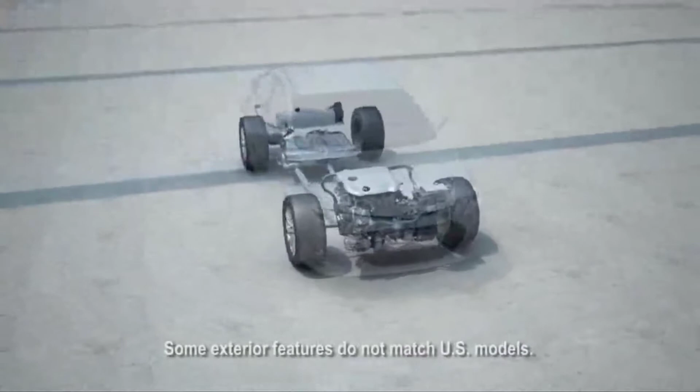The Sonata's hybrid blue drive is a quantum leap in engineering and fuel efficiency. So check this out. A quantum leap in engineering and fuel efficiency.

Why is this guy so massive? Because life.

Whoa, this is technically considered a hybrid starter generator, but look at it. Why is it so huge? What is it trying to do? What does it do? What's its purpose? Nobody? Hello? No?

So the engine, what's up? To start the engine, yes it does start the engine. What else does an alternator do? Well, it charges the battery. So this one is a hybrid. It does two things: it starts the engine when it comes to a stop, as well as charges the battery when it needs to be charged, depending on the amount of amperage input and output needed to support all of the electrical accessories in your vehicle. So since this is considered a hybrid system, it has a more robust hybrid starter generator.

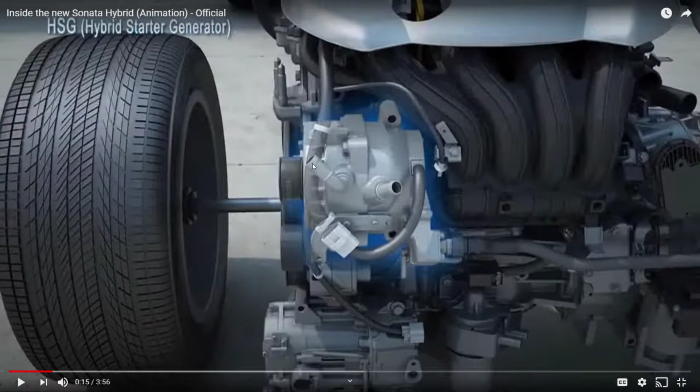Now, do you see these pipes right here? What do you think these pipes are for? This one and that one.

I love how I've been trying to talk this entire time and my mic's been muted. Oh no.

Cooling, yeah. So on this one, this is a rare case, but a lot of these heavy duty applications, you're gonna have an alternator that has a cooling passage with coolant in there. It's controlled by your engine temperature, coolant temperature, and thermostat. So it uses a water cooled system to keep your internal components cool. About 99% of alternators either have an external fan or an internal fan to cool it. In this case, this one actually has a coolant passageway that goes through the alternator to keep it cool. So it's pretty interesting.

The only thing, what do you think is the one downside about this system? About this one component right here? What do you think is the one downside?

It'll probably be pretty expensive to replace. Yes, it is very, very expensive. We had a 2013, 2014 Malibu that I was working on at one point at the dealer, and it had something very similar to this. It didn't have a coolant passage alternator, but it did have an alternator that was doing the ISG, integrated starter generator, purpose. The customer came in already out of warranty, and of course we did the diagnostic test, electrical circuits, checking the voltage, checking the parameters. The computer was commanding it correctly, but the actual ISG was not functioning properly. This component for the Chevy Malibu at that time was $1,200, not including labor for diagnostics or installing. So $1,200 to replace an ISG starter generator system.

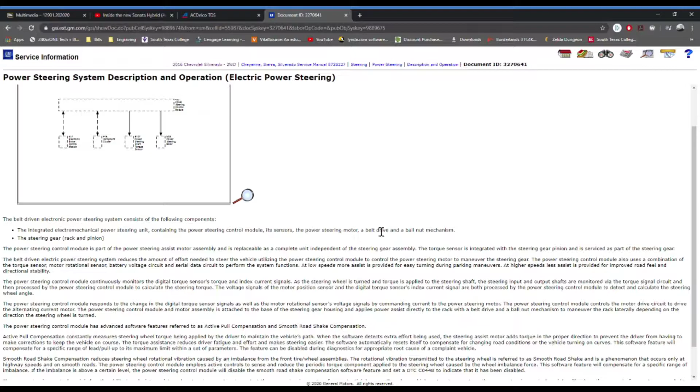So check this out. On this power steering system, the belt-driven electronic power steering system consists of the following components: an integrated electromechanical power steering unit containing the power steering control module, its sensors, the power steering motor, a belt drive, a ball nut mechanism, and the steering gear rack. So the whole thing would have to be replaced, and that's why it's extremely expensive.

Now, how do you increase the amount of effort in an electrical motor? What do you have to increase? It's electric, so how do you have to increase it? You have to increase the amount of amperage.

Exactly. So when you start adding a lift kit, big tires - 35 inch, 36 inch tires - something that's not supposed to be on there, what is happening to your motor now? It doesn't have enough power to actually turn the wheel. So what happens is you're stressing out this small electric motor that is not designed for this, and it overheats.

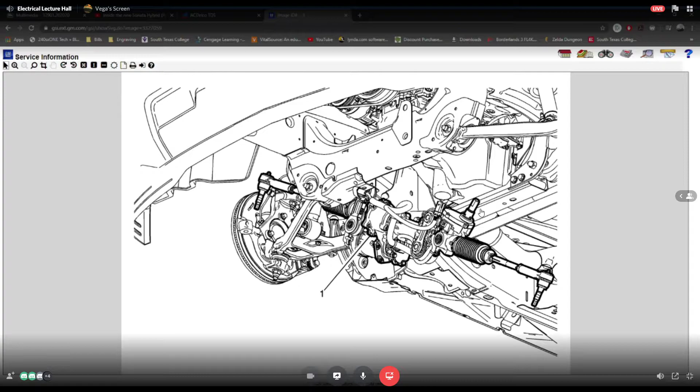Once it overheats, that's it - you cannot fix this unit. This unit is this whole assembly right here. Number one, this is your electric motor. This is your whole rack with your inner and outer tie rods, as well as your steering linkage that goes right there. This complete unit would have to be replaced in this instance because everything's built in - the motor, the module, the sensors, everything is inside this one module.

It's insane. Usually on a hydraulic unit, you have a power steering pump, some lines, and the rack - that's about it. You can replace things separately. On this one, it's not the case - it is a module slash power steering rack slash motor slash sensors, all combined in one unit.

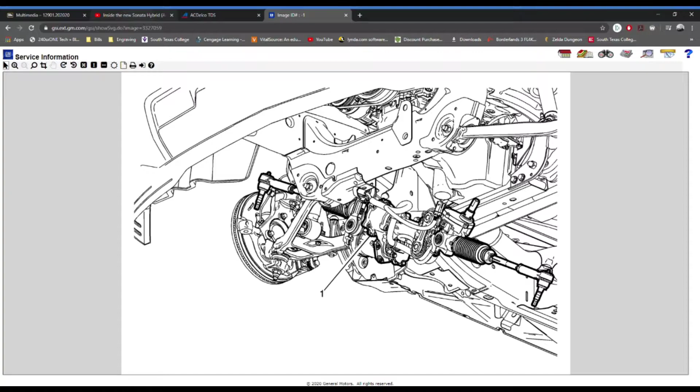It works good, but once it's being used for stuff it's not designed for, that's when things start to fail - and that's with any manufacturer. It's not designed for aftermarket things like that. It's pretty interesting, I've run across that several times at the dealer, and it was an expensive repair - you have to replace the whole damn unit. Customers didn't like that.

So going back to the HSG, this is Sonata's design for their hybrid starter generator. It is a massive looking thing. It is water cooled, and it does several things to actually charge the vehicle as well as start the vehicle when it is in a stop motion.

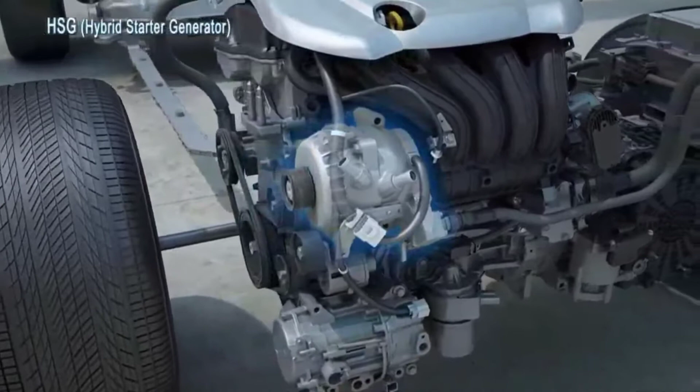Its unique system uses a hybrid starter generator to start the gasoline engine. Now if you look at this, it has a giant belt. It kind of reminds me of a supercharger belt, and it actually has several pulleys to apply a lot of tension to this actual hybrid starter generator.

The reason being is this guy has to rotate the crankshaft. The crankshaft is connected to your pistons. It is able to rotate the pistons and apply fuel and ignition to get it going instantly. So it's a very smooth transition.

Be sure whenever you work on anything new that you don't know - I've told you before - always look at the description and operation before handling any type of work like this. So be careful.

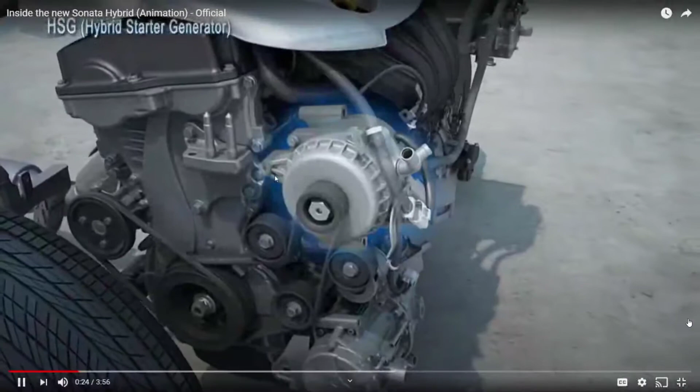The hybrid blue drive system. Hold on, what do you think? What do you think these two are?

Probably one's the water pump. Yeah, more than likely this is the water pump. What do you think this is? Power steering pump, most likely. What about the AC? Yeah, probably, could be the AC. I don't see AC lines going in though. Could be the power... actually, I think these are the AC lines right there, they're just not showing it. We'll see, maybe we'll see it later on.

But if you look at the front of the engine, there's not a lot of stuff going on. A lot of your vehicles nowadays have a giant belt going through your alternator, your pulley, smog pump. There's a lot of different things on there, AC compressor, idler pulley. They're actually bringing it down a lot.

If you look at this, more than likely this will be a water pump, which is physically driven by the harmonic balancer. This is your alternator, and I think this is your compressor, but we'll find out when we go through the video. They're actually releasing a lot of load by removing things that are being driven - AC compressor, smog pumps, alternator, power steering pumps - things that aren't really needed are being removed, which increases your amount of power from your engine as well as the fuel economy your engine can output.

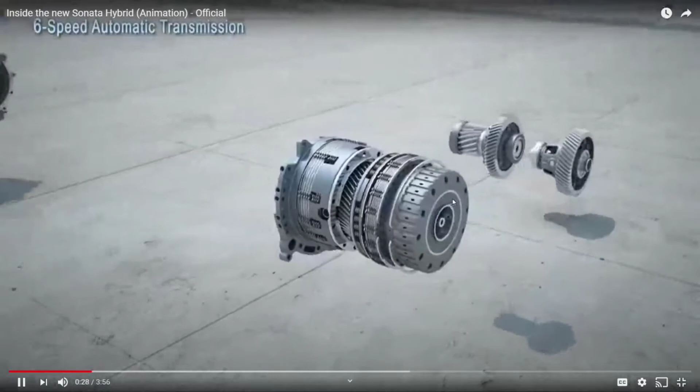So it's pretty cool. This hybrid drive system is among the first hybrid systems on the market to use a conventional 6-speed step ratio automatic transmission.

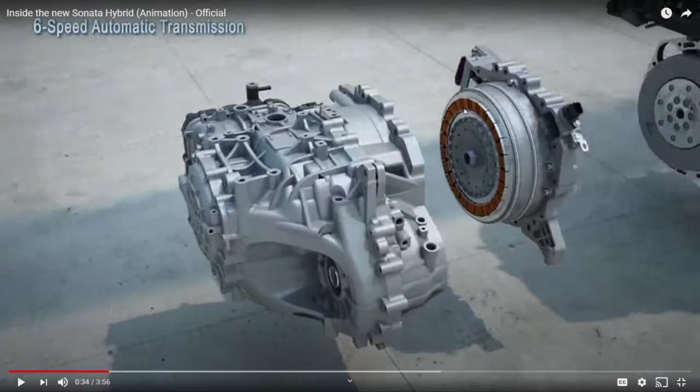So look at this, what does this look like now? I think we talked about this in starters. What does this kind of system look like? Looks like your brushes for a motor. Yeah, it's actually a brushless motor. So they incorporated an integrated starter generator, and they've incorporated a brushless motor that is attached to your transmission.

So now you have two different types of hybrid motors. It's pretty amazing because you still have a basic 6-speed transmission, but instead of having a clutch or a torque converter, you have an electric style system that's able to run your vehicle through electric power - this brushless motor applies power to your transmission while the engine is turned off, through electricity. It's pretty cool. This is kind of like a test phase where they've gone from internal combustion engines to a very strong hybrid phase, and now they actually pretty much have full electric vehicles.

But I thought this was pretty interesting. Now, me personally, would I buy this vehicle? Probably not, because there's a lot of electrical parts now. The more components you have, the more problems you're going to get down the line. Now you have a $1,200 ISG motor, you're going to have like a $2,000 electric motor between your transmission and engine. Everything is going to be stupid complex and expensive, that's what's going to happen.

And you know what? Everything down the line will wear out.

This line provides more satisfying feedback than the continuously variable transmission on competitive hybrids. The system's compact electric motor is placed between the gasoline engine and the transmission.

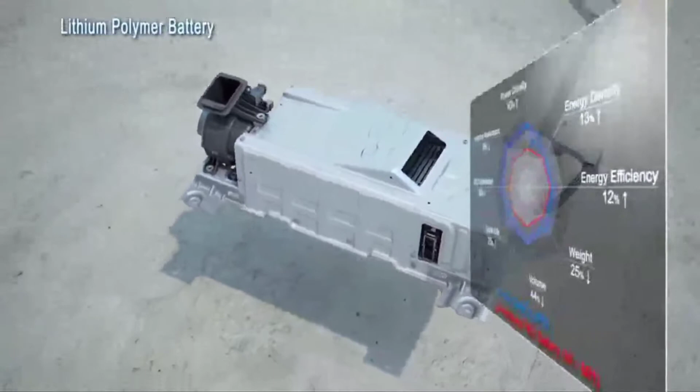The Sonata Hybrid's breakthrough lithium polymer batteries are 20 to 30% lighter, have 10% greater efficiency, and take up 40% less volume than the nickel metal hydride battery. This one actually has a blower fan motor incorporated inside the battery packs, because any time you increase the amount of amperage and voltage, these batteries start to get hot. I think Tesla has a method where they use engine coolant to cool the passages of the battery cells. This vehicle uses a blower motor to exhaust heat outside of the vehicle to keep the batteries cool. That was pretty interesting.

Volume than the nickel metal hydride batteries found in competitive hybrids.

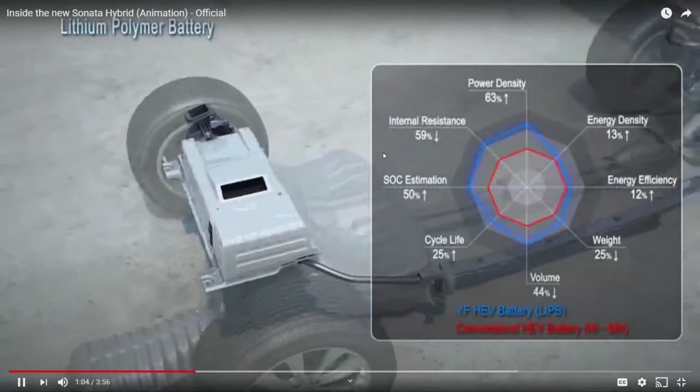The Sonata Hybrid's advanced design leads to a best-in-class highway fuel economy rating of 40 miles per gallon.

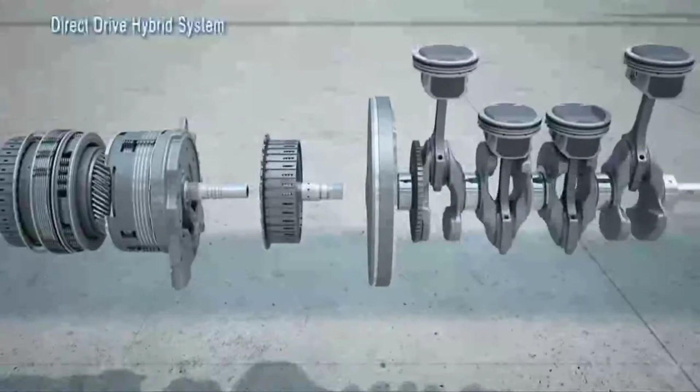The Sonata Hybrid is virtually silent at startup.

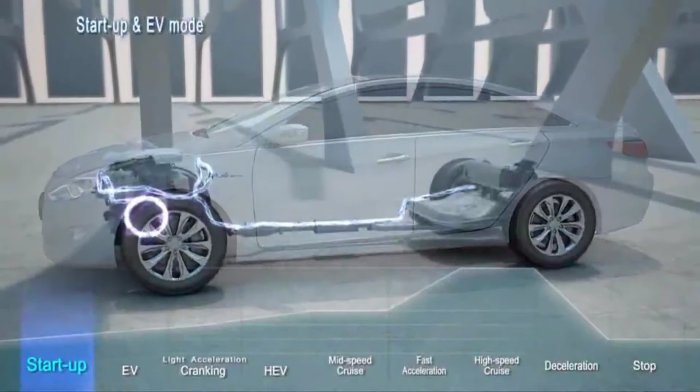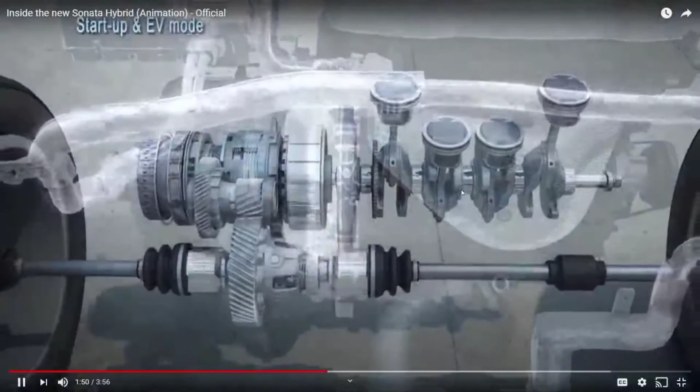As a parallel hybrid, the car initially operates on the battery-powered electric motor while the gasoline engine is off, minimizing fuel consumption and noise, and generating zero emissions.

As the Sonata Hybrid accelerates and more power is needed, the hybrid starter generator starts the four-cylinder gasoline engine. At this point, both the electric motor and the gasoline engine can work together, linked by the advanced clutch pack.

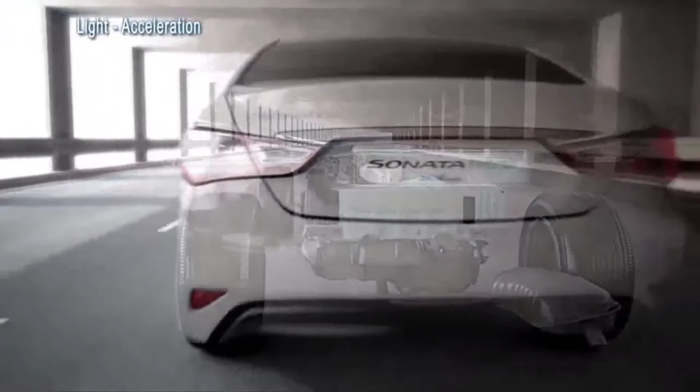Unlike many hybrid competitors, the Sonata Hybrid can run in electric-only mode up to highway speeds, which is a key reason for its high 40 miles per gallon highway fuel economy. The drive system is engaged by simply pressing the accelerator.

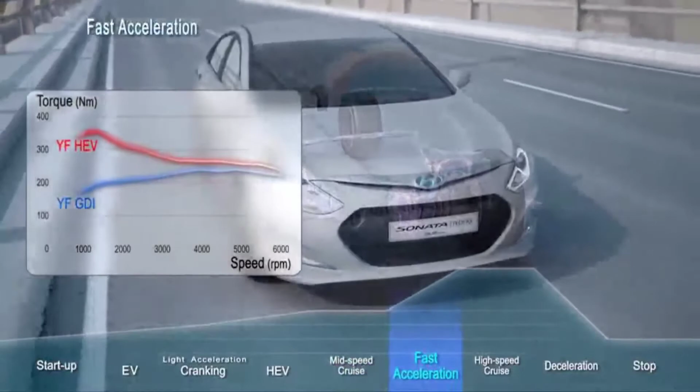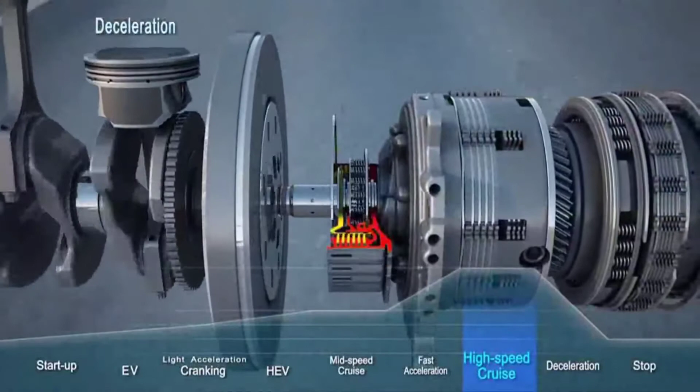For brisk acceleration, the power of the engine is combined seamlessly with the power of the electric motor. Then, when the driver wants to slow down, sophisticated electronic controls shut the gasoline engine off. During this type of regenerative deceleration, the Sonata Hybrid recharges its battery through the electric motor, using the turning force of the wheels.

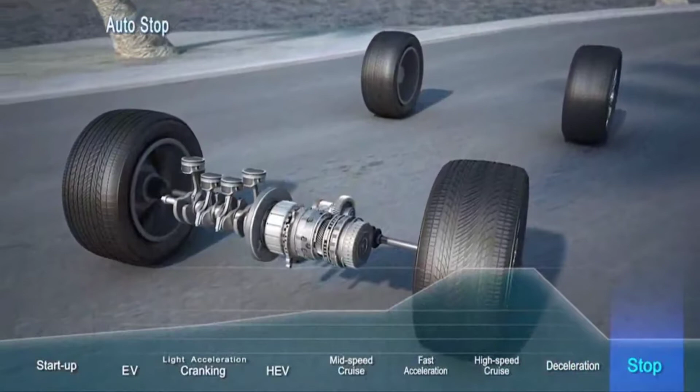In another effort to save fuel, anytime the car comes to a full stop, the gasoline engine is automatically shut off. With its remarkable technology and ingenious engineering, the Sonata offers a better choice in the hybrid arena. With the Sonata Hybrid, Hyundai takes a bold step forward in fuel economy leadership.

So I think they were saying it gets around 40 miles per gallon, but if you look at which is the highest miles per gallon vehicle right now, I think it's the Toyota Prius maybe. Toyota.

So what is this? They have a Prius and they have a Prius Prime. The Prime has 54 to 133. I think this might be a battery powered one.

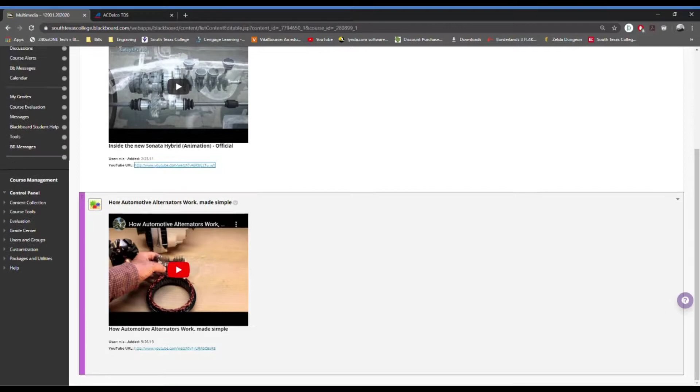Does anyone have any questions on the actual alternators themselves, like how that works, how to diagnose them, stuff like that? Let's see. Nothing? Crickets.

I mean, I wasn't here for most of it, so instead of going to the power slides, I rather do schematics. ACDelco does a really good job explaining alternator stuff. Yeah, that's good, that's awesome. If you guys are already doing your stuff, then you should already know how it works and all that stuff, so that's good.

And I don't want to bore you with slides. So ACDelco does a good job in theory, understanding how it works, the function, what the capacitors do, what the diodes do, how the electromagnetic system works, the conversion of AC to DC. What I really want to try to help you guys out with is the actual electrical portion and how to diagnose these things. Now understanding the theory is awesome, that's always the first thing you want to understand. Next is, okay, what do you do when something happens? How do you diagnose a circuit? That's the hard part.

Normally what I have you guys do, if you have any type of vehicle, is always try to get a diagnostic trouble code first. Now I'm going to show you how easy it is to be an electrical technician. It's not that bad. Once you understand how to read a schematic, how to use a DVOM, and how to comprehend what you're reading, it should be pretty simple.

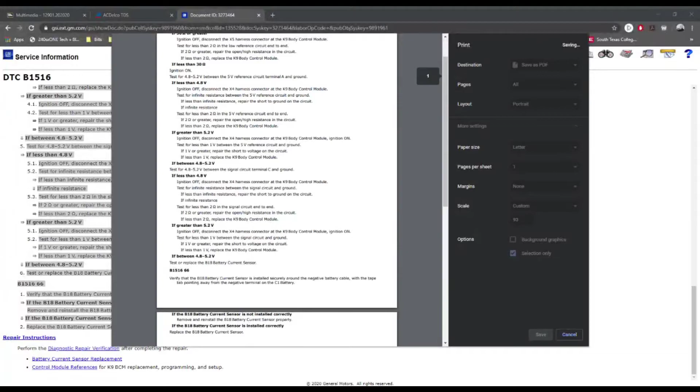So what I do in this concern is, of course, get my description. What do I have to do? How do I diagnose it? And then from here, I'll have a physical paper. I'll insert it here. Desktop.

So the first thing we gotta do is ignition off and all vehicle systems off. Disconnect the harness connector at the B18 current sensor. It may take up to 2 minutes for all systems to power down. Okay, so that's your first step.

Oh, you know what? It's not. It doesn't have the numbers. That's not good, so actually this is trash. We need to know the actual steps, so that might not work. You actually need to use this.

So first step is ignition off, disconnect the connector. Now, where do we find the current sensor? How can we find a current sensor? What do we use in SI and ProDemand to find where a certain component is?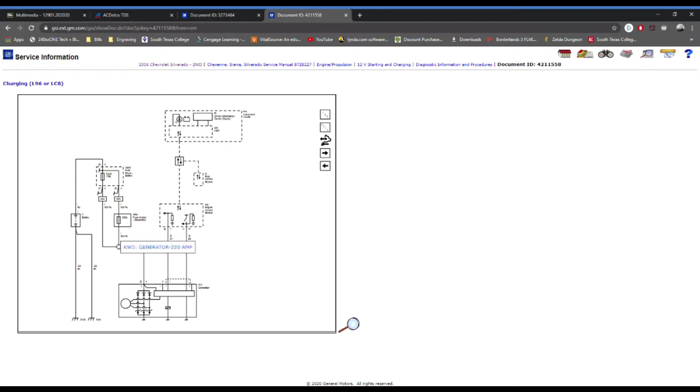Let me go open this, and we're gonna do the battery current sensor. Battery current sensor... Generator module, BCM, battery block - nope, not that one. Let's try the next one. Battery auxiliary fuse holder... Generator, no. There it is. All right, so we need this one, which I'll zoom in.

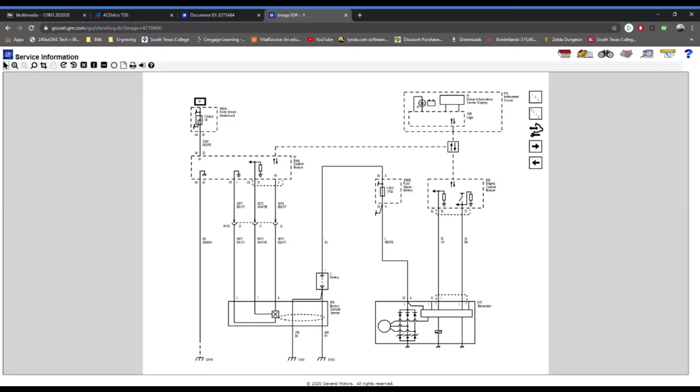There you go, your battery current sensor, you need that guy, and we need a component location. So the component location, what I use on this is called an electrical component list. So what we're looking for is our battery current sensor. Control F, battery current sensor. All right, so here we have it: it's in the engine compartment, left rear of battery, on the negative battery cable.

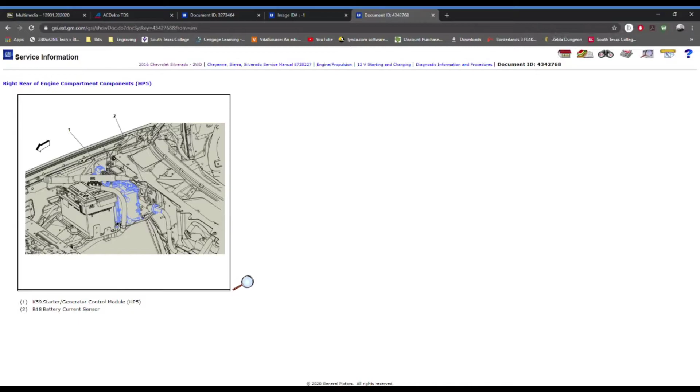So let's see if we can find it. And there it is, number 2. So number 2 states that this is your battery current sensor. All right, right there, that guy right there. Simple, easy. So once we know where the actual component is, once we have our actual schematic, and once we have our diagnostic steps, you're in good hands.

Now, did that seem like a lot of work already? No. No. Okay good, that's what I like to hear. It's not that bad, guys. The hardest thing is just looking up the information. Now this is what makes me upset, because when I have my Engine Performance 2 class, I'll have students trying to find one simple thing for like an hour. It's not that hard. You just have to put in the time and effort and try to use common sense.

Okay, I'm trying to diagnose a battery current sensor. Well, how in the world are you going to diagnose it if you don't even know where it's at? Does that make sense? Yeah - because in engine performance, there's going to be a lot of different sensors. Now, the only way to diagnose the sensor is to find out specifically where it is so that you can actually disconnect the connector, get to the actual sensor, and test it. There's no way around that.

And I've had students trying to get away with their job sheets, like, oh, it's already tested. Okay, well where's it at? What'd you get? How'd you get that information? How'd you get that number? I mean, you cannot fool me with this. You have to actually physically get it, and I know what the results should be because I know how these sensors work. So you have to be careful with that. I mean, this is for your own good - this is trying to help you guys become better technicians.

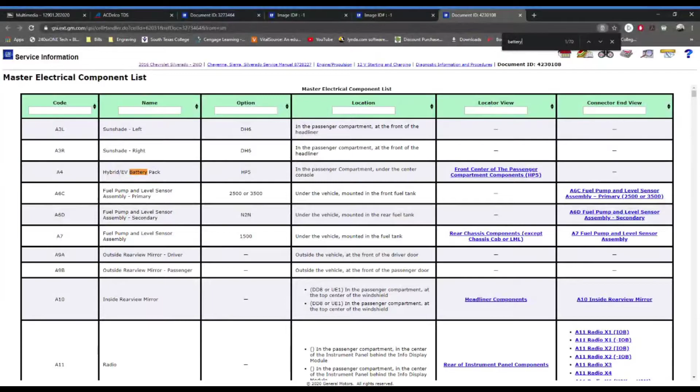We're going to get the battery current sensor, and we're going to get the connector end view. Boom - 3 wires, 3 connectors, 1 connector, 3 wires, A, B, C. So where is B located? Middle, the middle. What does B say? B says it is black and violet, circuit number 5077, and it is the battery current sensor low reference.

I want you to compare this to my diagram: 5077, black and violet. And look at that - 5077, black and violet, terminal B. Is everything correct? Everything match up? Yes, perfect. So what we're going to do here is once we have the connector end view, you're going to get your DVOM.

You're going to input one here on pin B, and the other end goes directly to ground. So pin B directly to ground, and we're measuring for resistance.

Test for less than 30 ohms between the low reference circuit terminal B and ground. If it's 30 ohms or greater, ignition off, disconnect the X5 connector at the BCM, and test for less than 2 ohms in the low reference circuit end to end.

Let's say we have over 30 ohms of resistance. What do you think the problem is going to be? I disconnected this circuit right here, and I'm checking from here to ground, and it says I have 30 ohms of resistance. What do you think that's telling me? Yeah, you more than likely have a bad wire on that circuit.

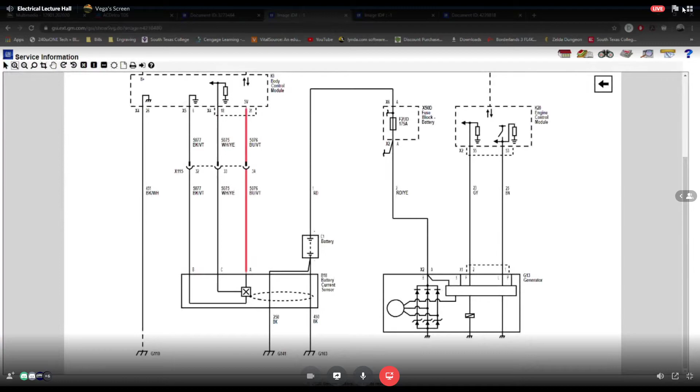Let me zoom in a little bit. This is my body control module. This is connector X4, terminal 26, connector X5, terminal 6, connector X4, terminal 18 and 21. So they all go to different connectors, guys. That's why a schematic is very important.

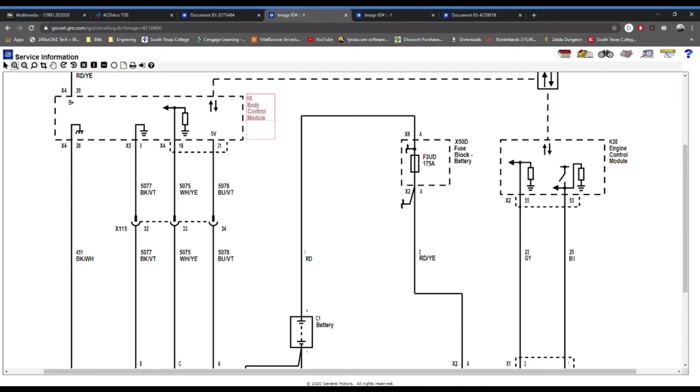In this case, it wants you to go to the body control module. You have to find it, its component location, and find out where that's at. Let's do that really quick.

So we're going to go back to our component lists and look for Control F, body control module. We find it right here, and it's number 7, the K9 body control module. So if you look at this, the BCM is right here.

Now I want you to look at this. This is where it's hard, guys, this is where people get very confused. Is this BCM located on the driver's side or the passenger side, and where? Can anyone tell me where it's located? Driver's side, passenger side, and where? That looks to be driver's side. Driver's side, where at? You're correct, but where at?

Is it on top of the left engine side, under the body paneling? Actually, it's located on the driver's side underneath, I would say, your knee bolster. It looks like this is where your feet are, your pedals are right here. This is more than likely going to be where your knees hit. So underneath that, you have the body control module.

So that's a pretty difficult place to access this system, right? But that's where it's at. This is actually a view of your instrument panel, that's your whole interior instrument panel.

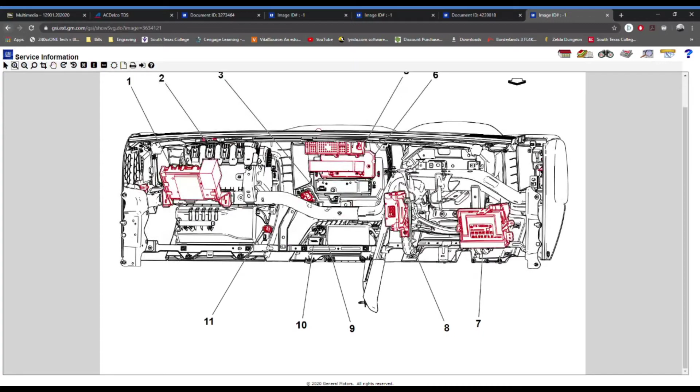We can confirm this by going to the numbers. If you look at number 2, it says passenger instrument panel airbag, and that's on the left side. So that's probably the best way to determine what side you're looking at. It says passenger here, so that's your passenger side, and this is your driver's side. So it's not your engine bay, it's actually the interior instrument panel.

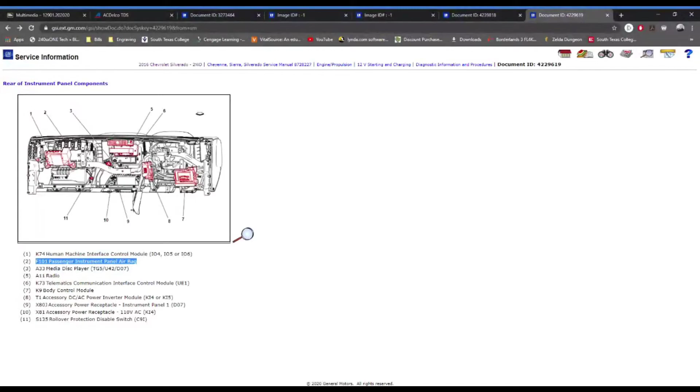Now guys, this is where it gets pretty fun and pretty tedious at the same time. So we found our BCM, we found our current sensor module. What it wants us to do now is disconnect the X5 harness connector at the BCM. Okay, so we found the BCM.

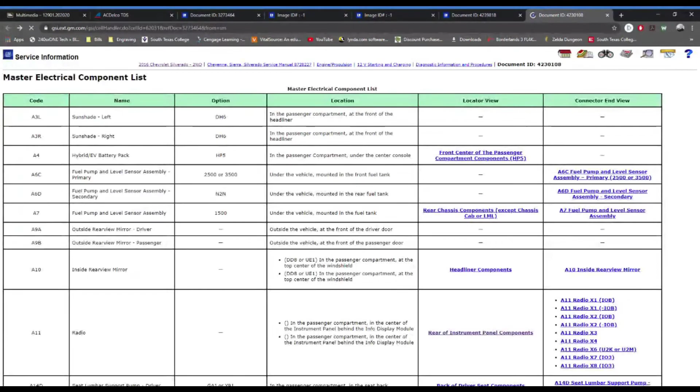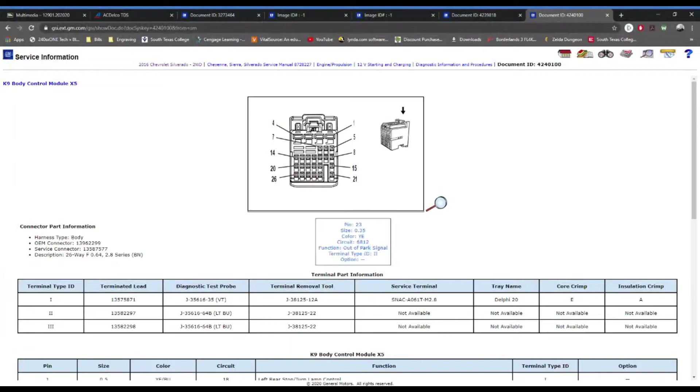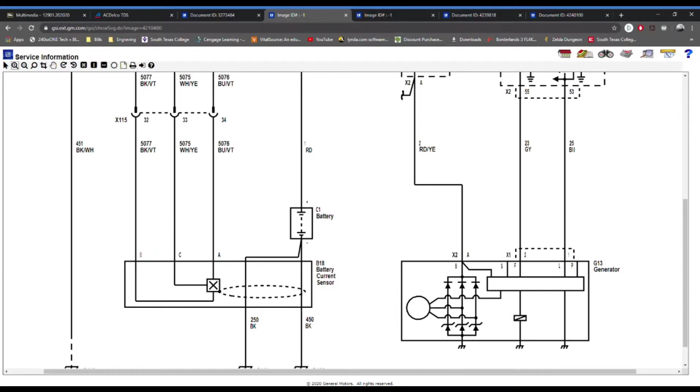And we need to test for less than 2 ohms in the low reference circuit end to end. On my schematic, B is my low reference. Where am I testing, from what point to what point? From my battery current sensor to my body control module. From where to where, guys? B to X5, terminal 6, and B. Exactly.

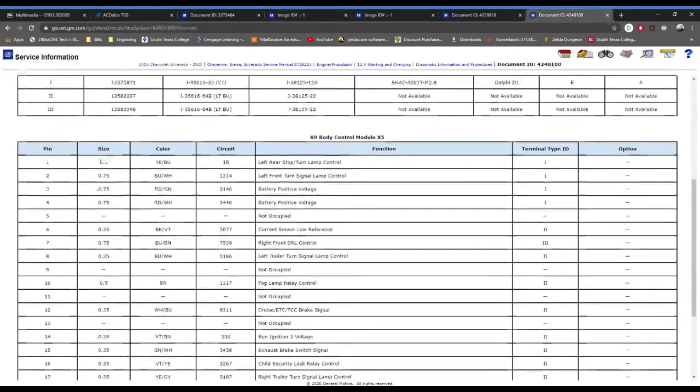X5, number 6, says, there you go. Does everything match up? Black violet, 5077, current sensor low reference.

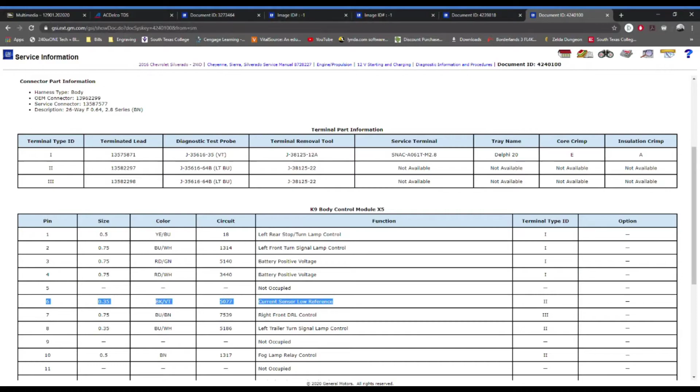B, on the current sensor, is black and violet, 5077, low reference. So what we're doing is getting a meter and checking it from X5 terminal 6, which is inside the vehicle, and running the DVOM all the way from here to your engine bay terminal B at your current sensor. Can you all imagine that? You have to run a DVOM wire from the right side of your engine bay where your battery current sensor is, all the way inside to where your BCM is, to connect your X5 terminal 6. Is that kind of tedious? Yeah, it's kind of a pain in the ass, but that's what it wants you to do.

So test for less than 2 ohms in the low reference circuit end to end. If 2 ohms or greater, repair for an open or high resistance in this circuit. Let's say we got 30 ohms. There is either an open or high resistance in the circuit. This would be high resistance because it wants less than 2 ohms. Now, if you checked end to end and you have less than 2 ohms, what does it want you to do? Replace the BCM because it's bad. Exactly. That's it. That's how hard and simple it is to do electrical diagnostics.

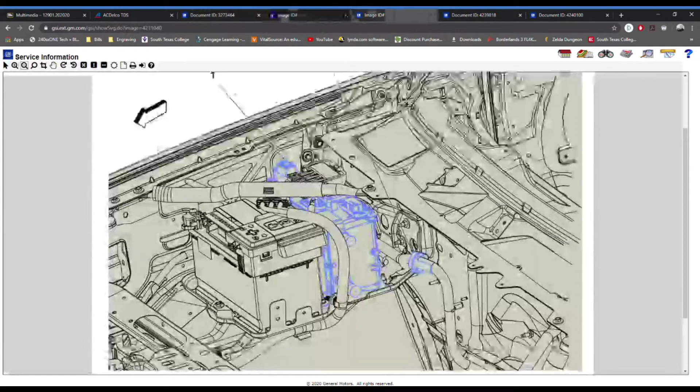Let's say that we had less than 30 ohms. Well, it wants you to do another step. It says, ignition on, test for 4.8 to 5.2 volts between the 5-volt reference circuit terminal A and ground. So in this case, we'd go back to my schematic, and terminal A is my current sensor control. So with your DVOM, you're going to go positive here, ground to ground, and you should get a voltage reading between 4.8 and 5.2.

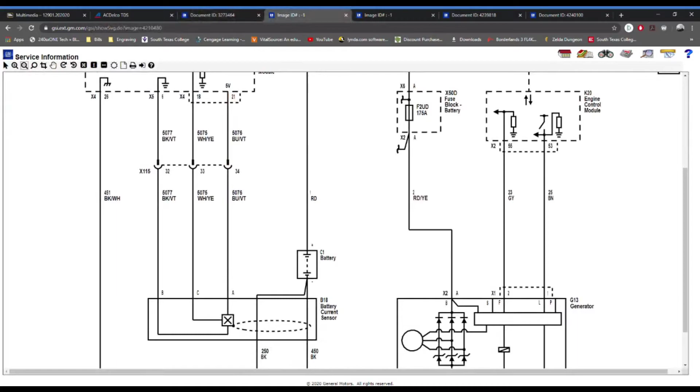If less than, you do this step. If greater than, you do this step. And if it tests between, it says test for the 4.8 to 5.2 voltage signal between terminal C and ground. So all it's doing is checking your battery current sensor A, B, and C to your BCM - 5 volts, ground, and signal - to make sure my BCM and my current sensor are working correctly. Right there it gives you a process of elimination: it could be the sensor, the BCM, or a wire. Does that make sense? Indeed. Yeah, at least to me.

I know it's a lot to take in, but that's what it is, guys. That's electrical. This is what I love to do out there. I like it because it tests your capabilities, and every day was something different. I don't think I could work at a job where I would be doing the same thing over and over again - I would get bored. With this, I'm always testing my mind. I'm always getting more experience because every time an electrical concern comes in, it is usually never the same as the previous vehicle because there's always different things - high resistance, no voltage, blown fuse, open circuit. There's always different things out there to diagnose.

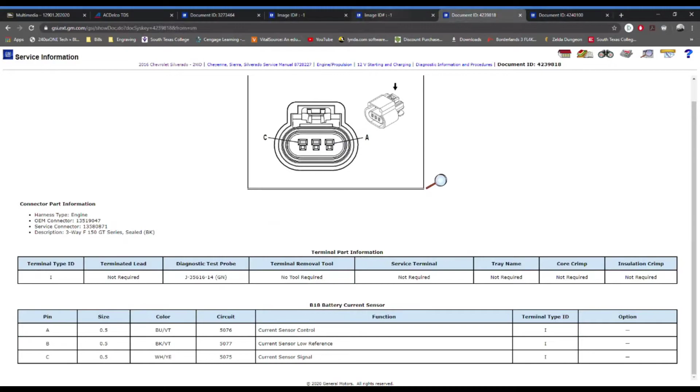And honestly, I like this work. It's tedious, but some things are easier than others. But the best thing you can do is practice, practice, practice. Once you practice, guys, it becomes second nature. It's super easy. That's why when I'm looking through things, I'm pretty quick at it because I've been doing it for many, many years. But the only way you guys get better is you need to practice, practice, practice.

Understanding the theory is awesome. It helps you understand how the system works. The main job you're going to do as a technician is repair the vehicle. Understanding the theory plus understanding how to diagnose it is the main goal for school, especially for this. And let me tell you guys, you need to learn the electrical field if you're going to stay in this system, because our vehicles are getting more complex and more sophisticated every time.

I think the only thing I really had trouble with is... what is that noise? My dogs.

Communication networks. Communication networks are becoming faster, and it's more difficult. Let me just show you a quick reference real quick.

If you noticed, a lot of our vehicles are coming out with a lot of stuff, a lot of accessories, a lot of components. The way everything works together is through communication. It's no longer a voltage or ground being supplied to one another, it's actually a multi-node network.

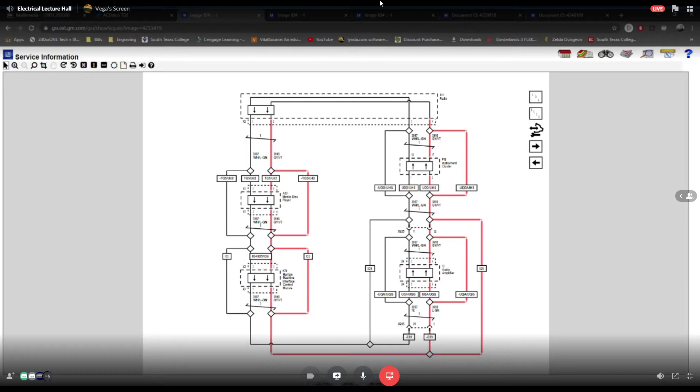For a job like that, do they give you a certain amount of hours to diagnose it, or how does that work?

So when I did communication diagnostics, I would clock in straight time. So whatever amount of time I'm putting in is what I'm going to get paid, because these were the most difficult systems that I've diagnosed.

Look at this one, this is a little bit more complex. This one, yeah, it's a little bit more. I'm not going to lie to you, I've always had problems with communication networks.

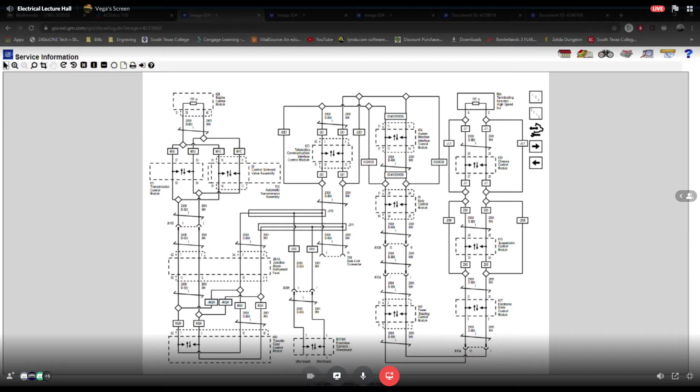This one includes your engine control module, transmission, junction block, transfer case, front view camera windshield, telematic communication, human interface, body control module, steering control module, EBCM, electronic suspension, chassis, and a terminating resistor. So there's a lot of modules that need to talk to each other.

And it's usually through one or two wires that go through the whole entire communication network. If one shuts down or one is cut, that's where it becomes a little bit more difficult to diagnose, because you need to find out which two stopped communicating.

Let's say it was my ECM to my transfer case. Well, the good thing about this diagram is, okay, you need to check this circuit through my transmission, X115, and my junction block to get to my transfer case, because those are the only wires that run from there to there. Don't worry about the rest, because everything else is communicating fine — it's just transfer case to engine.

So yeah, it's a little bit more difficult. These are my headaches — this is where I always had headaches.

But the way they would pay for this, you have to pretty much explain to them, hey, this is not an easy task. If you want me to work on diagnostics for a communication network, I would usually get paid straight time.

So you would pretty much clock in and clock out. If I started at 1 and finished at 3, that would be 2 hours of my time, so I'd get paid 2 hours times the $28 I was getting paid — that's for the 2 hours I spent trying to diagnose that circuit. Now if I couldn't figure it out, I'd clock out, work on another car, come back in, clock back in, and still get paid those hours because I'm still trying to diagnose the problem.

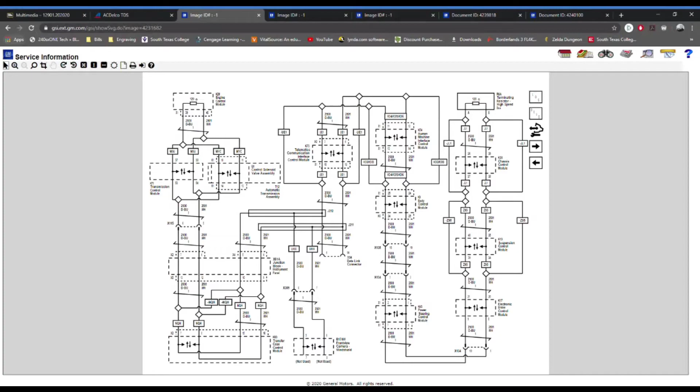As you can see here, GM at this time already has data links, high speed, chassis, powertrain, MOST, and local interconnect network. So they already have a lot of networks combined together. If you look at this, mostly all modules connect to each other. So yeah, there's a lot.

If you look at this, remember I was saying about your switches on your car, your truck, your Tahoe? Everything was power and ground, power and ground. Here you have a lot of little switches, and they're not really called switches anymore, they're actually called modules now. So if you look at this, this is a communication network for this truck.

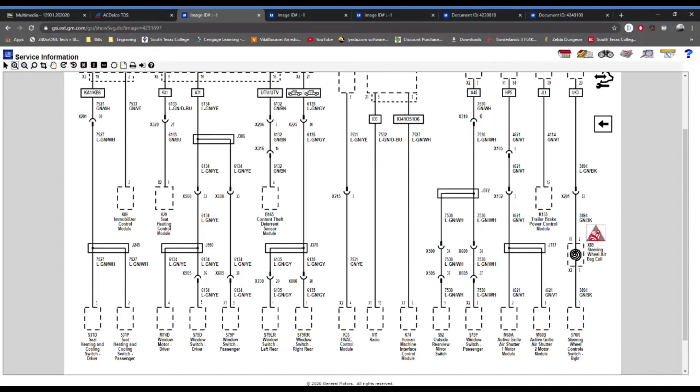And if you look here, you have a seat heating cooling switch, window motor driver, window switch driver, window switch passenger, window switch left rear. Why are these switches connected to a communication network? Because they're all little modules. Every switch in today's modern vehicle is literally a driver or a module that sends a little bit of data information to another module, and then the module does most of the work.

So what does that little truck icon mean on this one? If you look closely, it actually means either extended cab or four door. Oh okay, yeah. Glad you saw that. What truck is this?

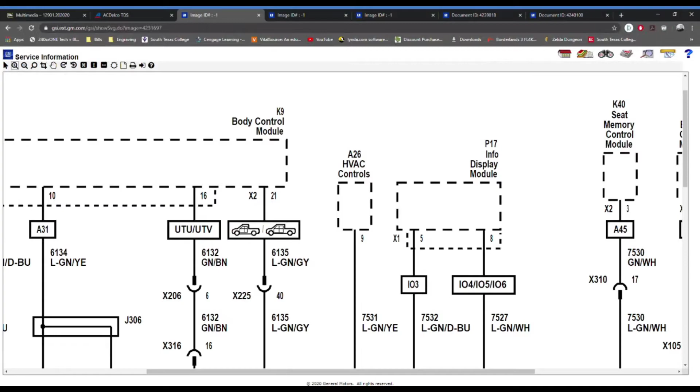What vehicle is this? This one is a 2016 Silverado, so it has extended cab and four door. I think there's a difference because I don't even think the extended cabs have the switches on the back. If I'm not mistaken, that might be why it's different. So just be careful on that.

But you will see stuff like that on different vehicles, makes and models. Like I said, I more specialize in GM because I worked there for 8 years, but Ford, Infiniti, Nissan, they're all going to have their own type of information. And I've had students that have different makes and models, and I can't help them sometimes because ProDemand is very limited in the resources that we need.

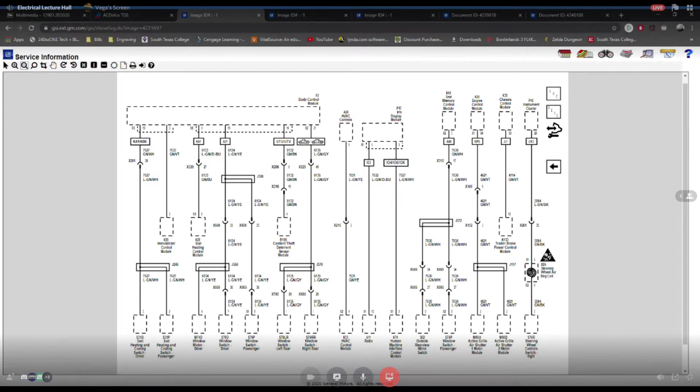The only way we can get the proper information to properly diagnose it is to get the information directly from the dealer, so that we can use that to properly diagnose the circuit. Because I don't like to recommend something if I'm not 100% sure it's not it, you know what I mean? I don't like to just throw parts in there to see, oh, this should fix it, this should fix it.

No, I like to make sure the circuits are good. If the module's bad, why is it bad? Is it because there's no power? Did it fry? So on and so forth. But that's me.

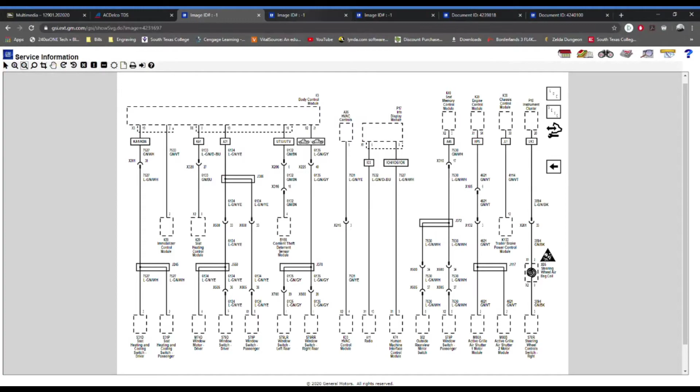I have a friend that's going to bring me his car tomorrow. One of his windows doesn't go up, but it works sometimes. I don't know, because I was doing a suspension on it, and then he wanted to fix it, but I didn't have time because he needed the car back. What kind of vehicle is it? 2009 Nissan Altima.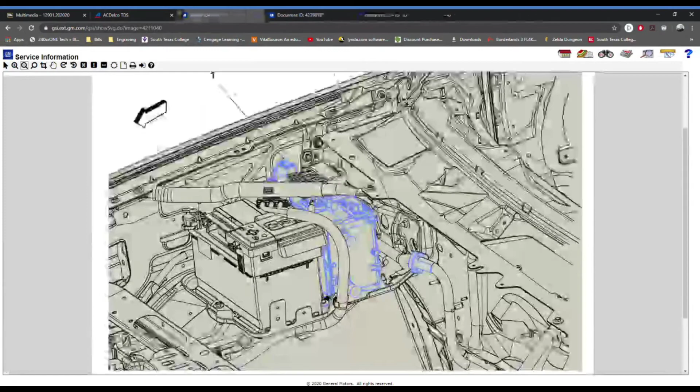Well, I'm not going to have the diagrams for it, but let's see if the school has it.

But he said it works sometimes, right? Yeah, I was thinking maybe it's the connection or something. Maybe it could be cleaned with connection cleaner, electrical cleaner. That's what I was thinking at first.

Let me check real quick, it works sometimes. It should have some connection issue, right? Yeah, it could be connection. 2009 Nissan Altima, yeah.

It's the S. Yes, let's see if it has it. Diagrams, system, power mirrors, power windows. Four door or two door? Four door, sedan.

Hey, well here you go, man. You got access to schematics. So if you look at this, it looks a lot different now.

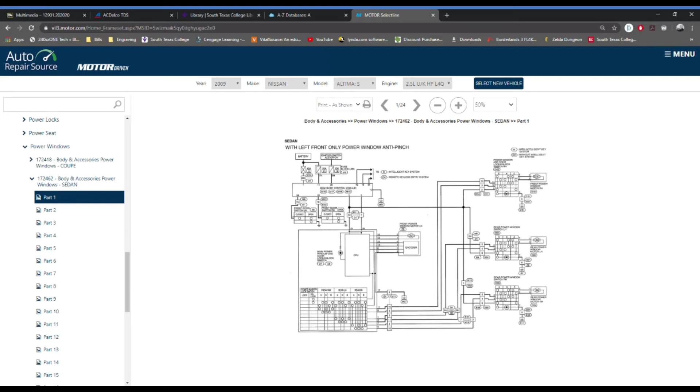Now, which one's having the problem? The driver, or do they both not work? Driver and the back passenger? Front or the back? It's the passenger, the back side. Rear. So the right rear window, right? Passenger rear window, yeah, that one and the driver's side.

All right, so if you look at here, you've got a simple motor. Rear power window motor, right hand. So this is the right rear window motor.

Now what do you think it needs? It only has 2 wires going into it. So what do you think it's doing? Bad connection? Well, it could be, but what do you think 1 and 3 are receiving at my motor? Power and ground. Yeah, power and ground.

So what you can do to make sure your motor is working correctly, I would probably take off that panel and get a power and ground and apply it to 1 and 3, and then just reverse the polarity. See if the window motor goes up and down.

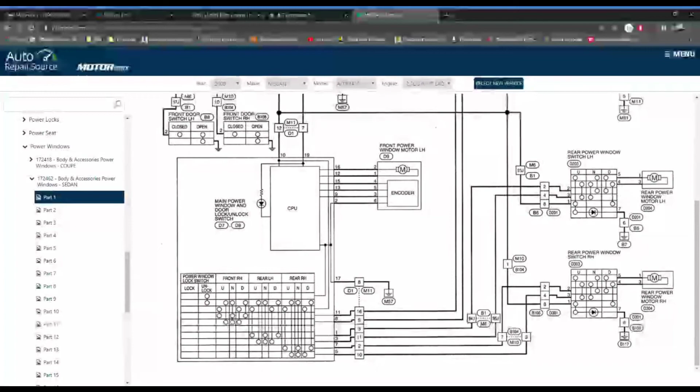If it does go down very nice and smoothly, then we have a problem with either the switch, which we have to diagnose, or it's coming from the main power window and door lock unlock switch. So this is your main switch.

So now if you look at this, you see this is where it gets more complex, because this is actually your main window switch on your driver's side switch. It has a computer in here. In this computer, it pretty much tells it what to send to my rear power window switch, left hand, right hand, and yeah, so it's control.

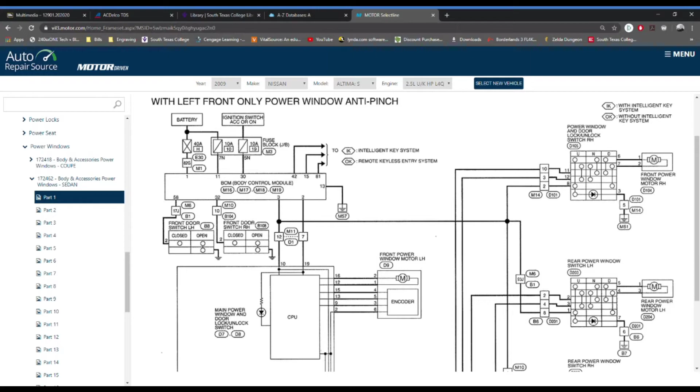This one's more complex. Not only that, do you have an intelligent key or a remote keyless entry system? This one's a little bit more difficult, and it really doesn't tell me what's up. It's a push start. Okay, so then it does have the intelligent key.

And now his keys are all taped up and shit. Oh no. But like, this is the chingado switch.

Switch, 5 and 4. And you see, this is the actual electrical board internally, but it doesn't tell me exactly what it does, and I'm not sure exactly what it's trying to say here. But you only have 3 wires coming in from your main switch to your rear power window switch, which then controls the power and ground to the motor.

Excuse me, this one might be a little bit difficult because I can't really understand what it's asking for. If anything, we would see if we can find a diagnostic chart for window switches.

Let's look at... to make, uh-huh. Something like, to give it power, how you said, to connect the motor, right? Mhm. Like, what would you make? Well, I know you had that tool to get power, but like, yeah.

What you can do is just get a fused jumper wire connected to your battery positive. That can be your positive, and then your ground, you can just get another wire and ground it out anywhere. Then just touch them together. Make sure you don't touch them together directly, make sure you touch it at the connector, and it should work. Yeah, because if you touch them together, that's why your fused jumper wire will pop.

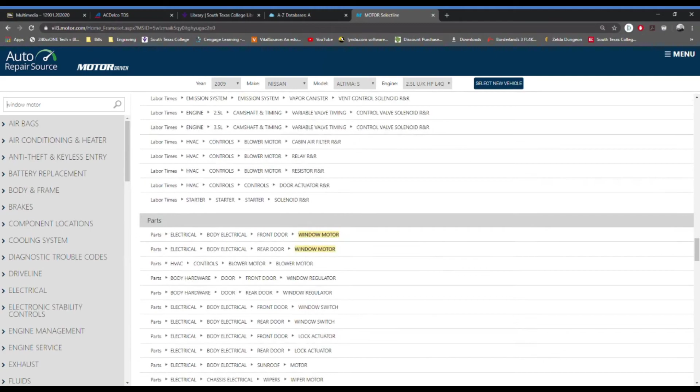Because that's what the thing is good for, right? That machine, the tool. Yeah dude, it comes in handy. That's why I like it a lot. What's it called again? Power probe. Power probe, yeah. I might just look for one of those too. Yeah, you can, I think the cheapest ones are like $40. They're not bad.

Main power switch, D7. That's not what I'm looking for. See, the only thing about the auto repair source is it doesn't really give you diagnostics on how to fix it. So this might be a little bit difficult.

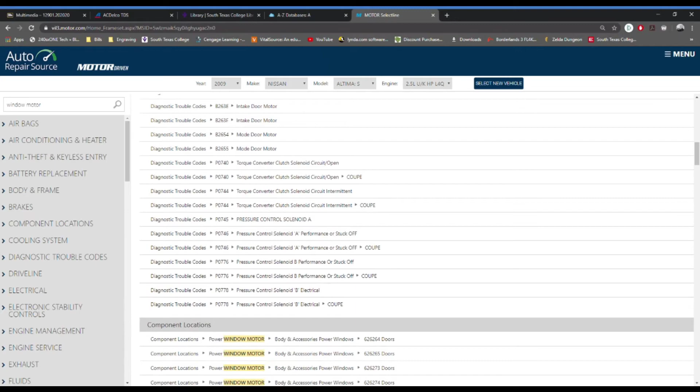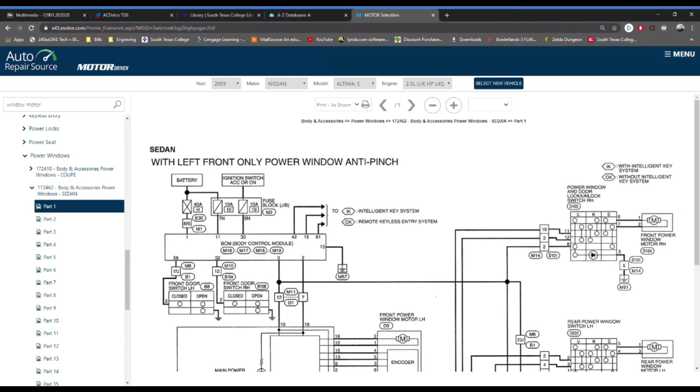What I would do personally is I would probably go directly to the, how do I move this, directly to my motor, make sure the key's on the on position, and move the switch up and down and check at 1 and 3 if I get polarity and reverse polarity with a DVOM or test light to ensure that my switch is sending the correct signals to terminals 1 and 3, which should be 1 power, 3 ground, and when you reverse the process, 3 power, 1 ground. Does that make sense?

Yeah, that's what I would do. Just make sure that you're getting the actual output. Now, if you are getting the output, then more than likely you're getting a bad motor that has to be replaced. But that would be the easiest thing to check out. Just make sure you're getting the correct voltage and ground out of the switch to the motor, and make sure that it's getting correct information. If it is working, then more than likely you have a bad motor.

Like I said before, these motors are very similar to a starter motor. And when a starter motor goes out or the brushes start to wear out, it will not move. Actually, if you give it a tap on the actual motor itself, it'll shift the brushes and it'll start to work again. I would even try that. If you do that and it starts to work again, then more than likely you have a bad motor internally and the brushes are just worn out completely.

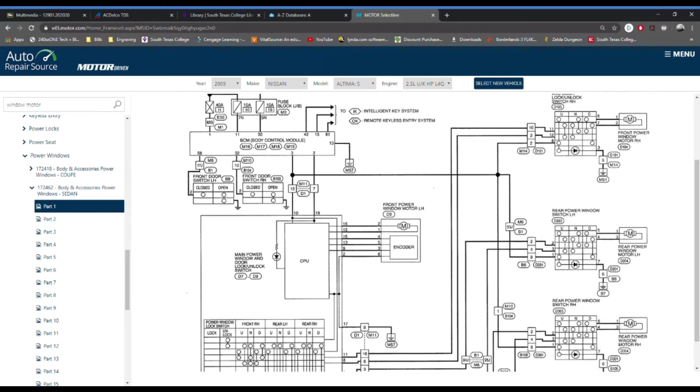This is going to be an interesting one, because you do have the schematics here, but as you see here, it looks a little bit different than what I've been going over. Yeah, it's a little bit different. It still has, but I get my fuses on top. This one's gonna be a little bit more difficult because it includes inputs for what you're actually doing, like if you're unlocking or locking the door - it actually tells you. The only thing is I've never worked with this, so I'm not sure exactly how to read it. So it is telling me the inputs, the outputs, and what it's actually doing, the computer, and all that stuff, which is good information if I understood it. But even I don't understand this.

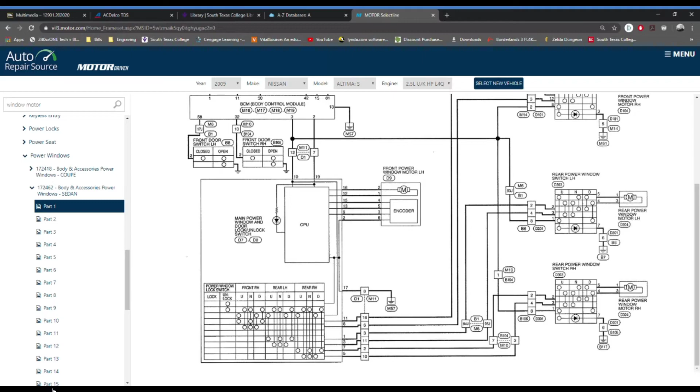Where'd everybody go? I don't know. We're dying slowly, slowly fading away. We're about to end the class anyways.

But yeah, Steven, check it out. Do the simple stuff. Check the powers and grounds on the output to the motor and see what you got. If you do have power and ground, then more than likely, like you said, you have a loose connection or you have a bad motor. Also, if it's going very slow on the rails, check the channel where the window runs on and make sure it's out of debris. Make sure that there's no stuff in the way of it because it will mess it up and it'll slow it down and it'll overrun the motor, which will overheat.

Yeah, cause I was thinking of just buying those things first, cause I still need it for my truck. To clean the electrical wires, the connections, yeah. Cause I have trouble with one of my back doors. It has the unlock button, but when I click it, I just hear a click, and it doesn't work - it's probably like stuck or something.

It could be the lock stuck. Yeah, it could also be the motor's not strong enough now. Motor's burned out, worn out. Yeah, those are all possibilities. I still needed that stuff anyway.

The best thing to do is just check for voltage and ground. If you have good voltage and ground, and it's still struggling to move, like John said, more than likely you got a bad motor. It's old and it can't support all that amperage anymore. But always do your basic checks first before trying anything else. That's just me, I always try to check it off first before doing anything.

Yep, it's insane man, but like I said, all these things are for safety reasons, they're adding a lot of stuff. It's insane, and it's always good. Like I said, owner's manual, there's a lot of stuff in there and not everybody reads it. But if a customer were to bring this to you and say, 'I can't turn when the blinker's not on,' well ma'am, that's actually the way it's designed, so it's actually a normal operating system. People don't really look into that. I mean, shit, I would charge them, like hey, you want me to look up the information and read it to you? Well there it is, $100, 1 hour at least. So it's crazy, it's funny, but yes, technology nowadays is insane.

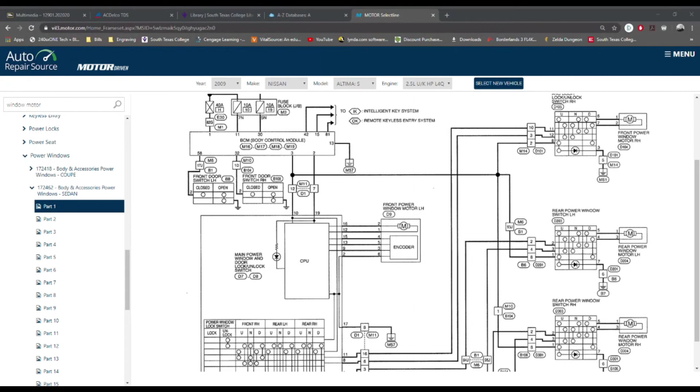What's up, I'm thinking of putting an electric fan in my Tahoe. Yeah, that'd be badass. You gonna manually turn it on, or are you gonna have it through a switch or relay? I don't know, it's gonna be kind of hard for me to do that, so I'm thinking about it, electric fan.